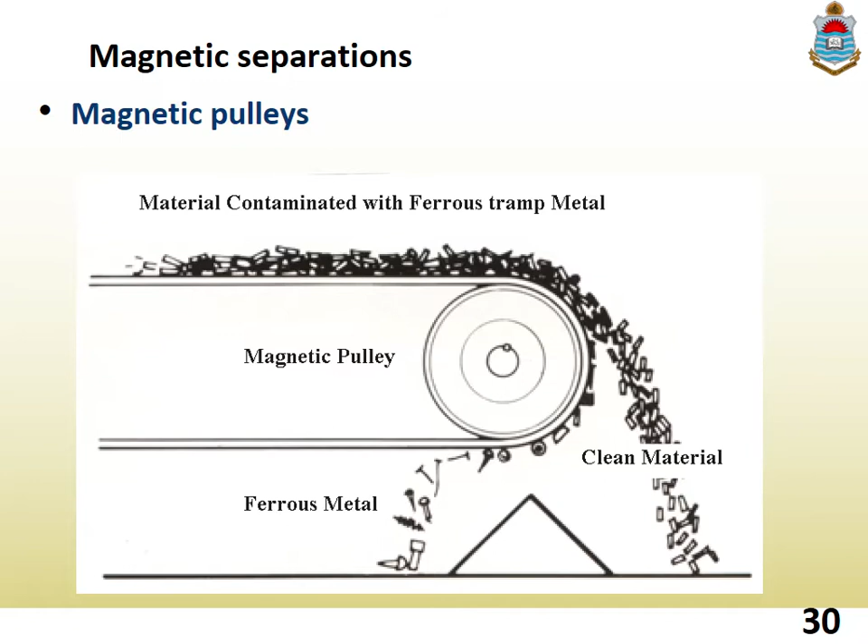pulleys, and one of them is shown here in the figure. In this configuration, the magnet is embedded in the head pulley of the conveyor. As the pulley spins, the magnetic force grabs the ferrous particles and carries them around and under the pulley, as it was shown in the figure previously, until the natural belt separation from the face of the pulley forces the particles to fall in the separate bin.

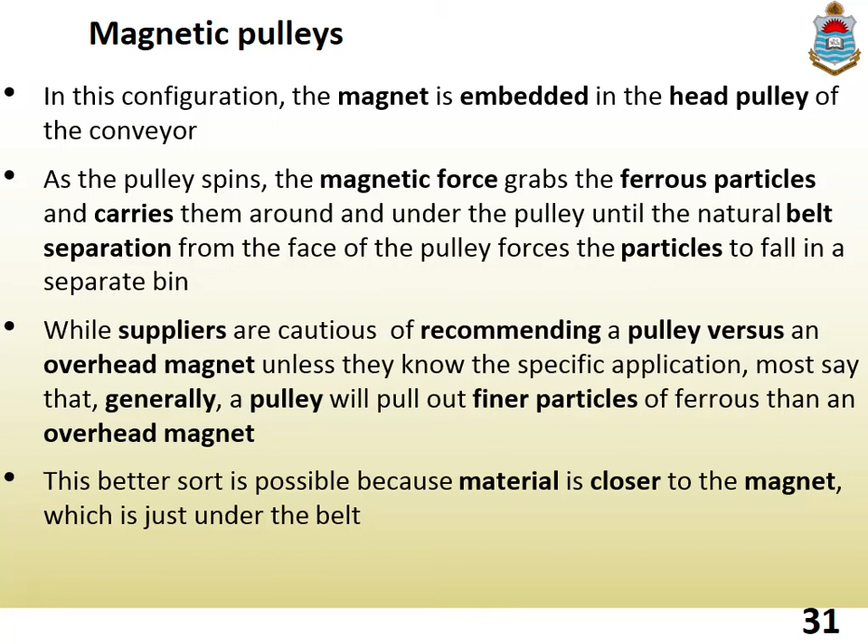While suppliers are cautious of recommending a pulley versus an overhead magnet unless they know the specifications, generally it is regarded that a pulley will pull out finer particles than the overhead magnet. Better sorting is possible because material is closer to the magnet in this case.

As far as the pulley is concerned, gravity is working in its favor as compared to the overhead magnets, where the magnets had to work against gravity because the overhead magnets had to pull the materials which are falling down. But in this case, the pulley is not exerting any extra force opposite to gravity.

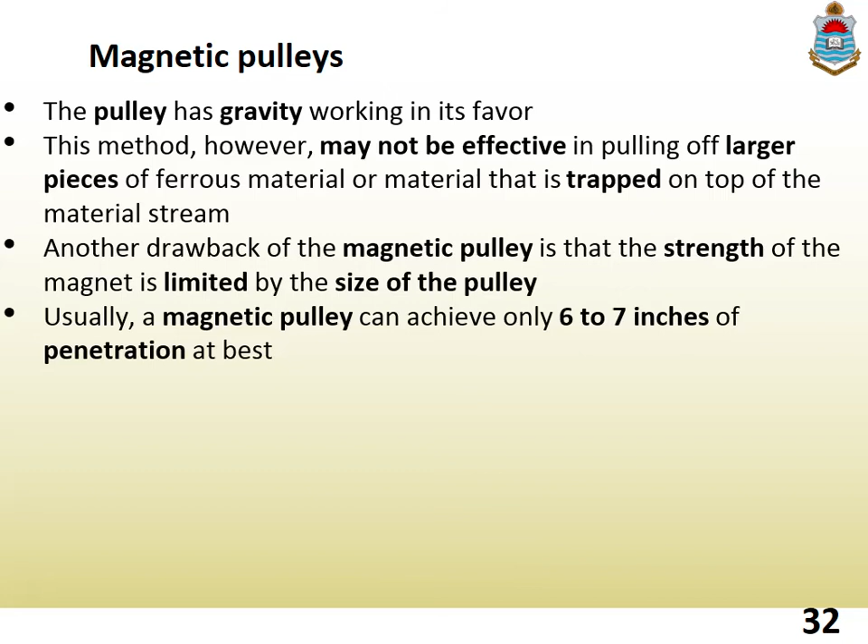However, this method may not be effective in pulling off larger pieces of material, or if some material is trapped on top of the material stream. Another drawback is the strength of the magnet is limited by the size of the pulley. Usually a magnetic pulley can achieve only 6 to 7 inches of penetration.

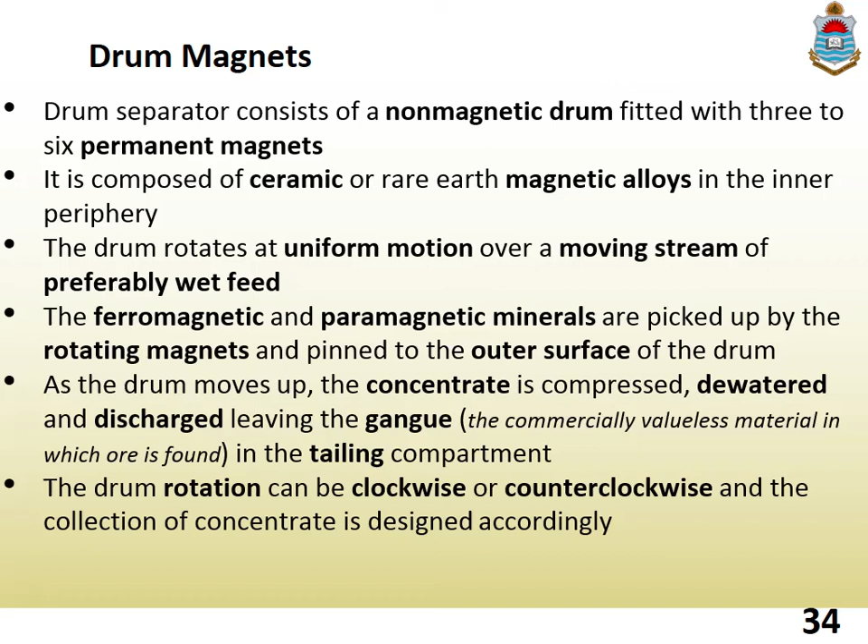The drum has a uniform motion over a moving stream, and mostly the feed is wet. Both ferromagnetic and paramagnetic materials can be picked up by the rotating drum. As the drum moves up, the concentrate is compressed, dewatered and discharged. The drum rotation can be clockwise or counterclockwise. And this type of separation produces extremely clean magnetic concentrate.

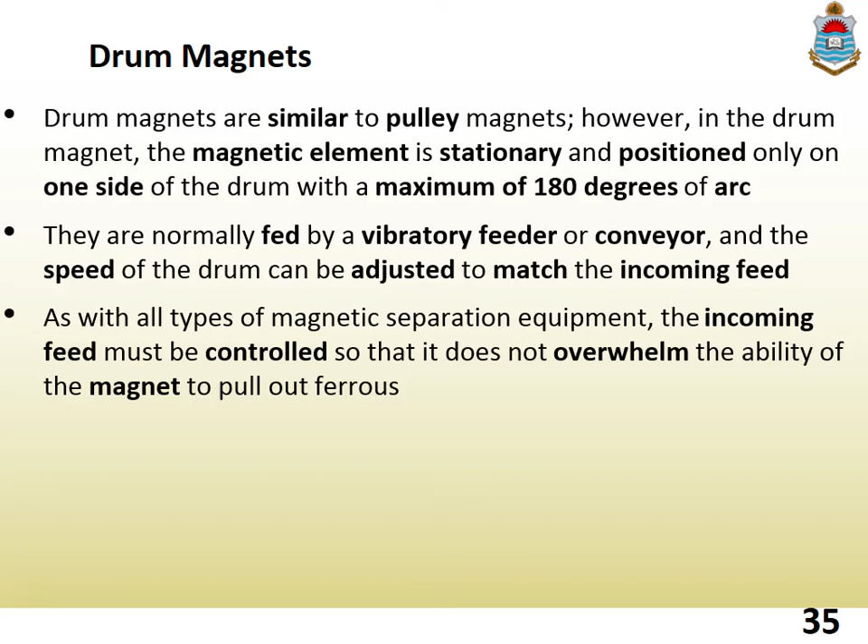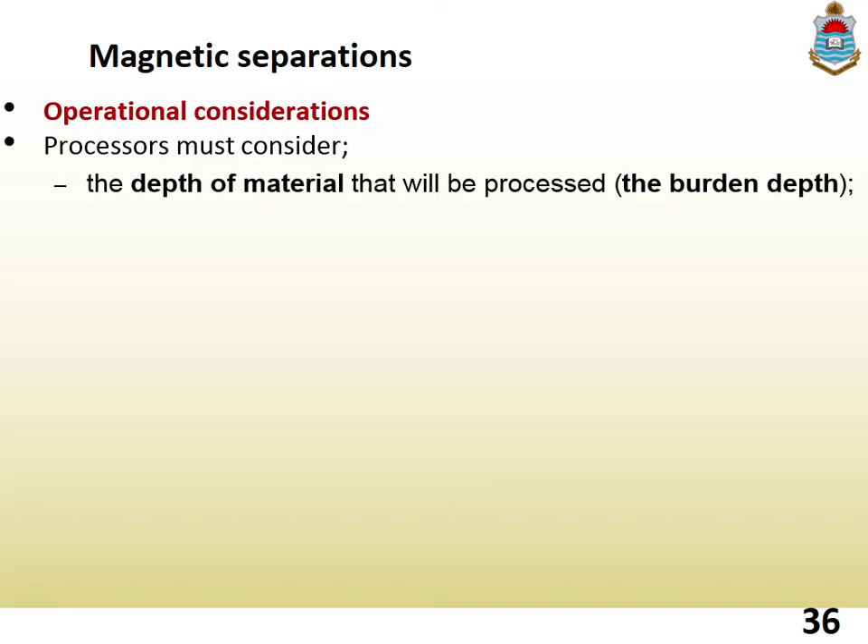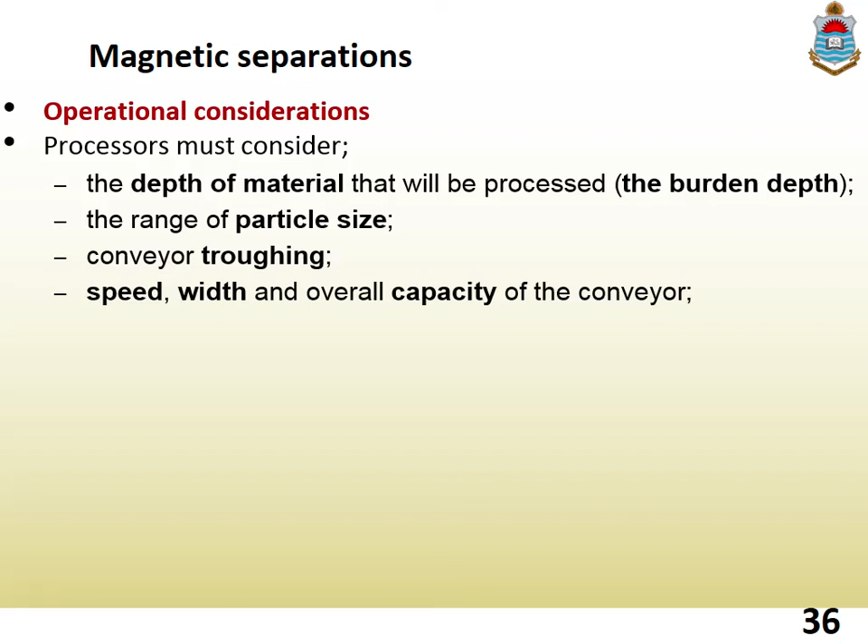So now we will discuss some operational considerations for magnetic separators. The processors must consider the depth of the material that will be processed, which is referred to as burden depth. We will see the definition in the next slide. The range of the particle size, conveyor troughing, speed, width and overall capacity of the conveyor, and also the density of the material stream.

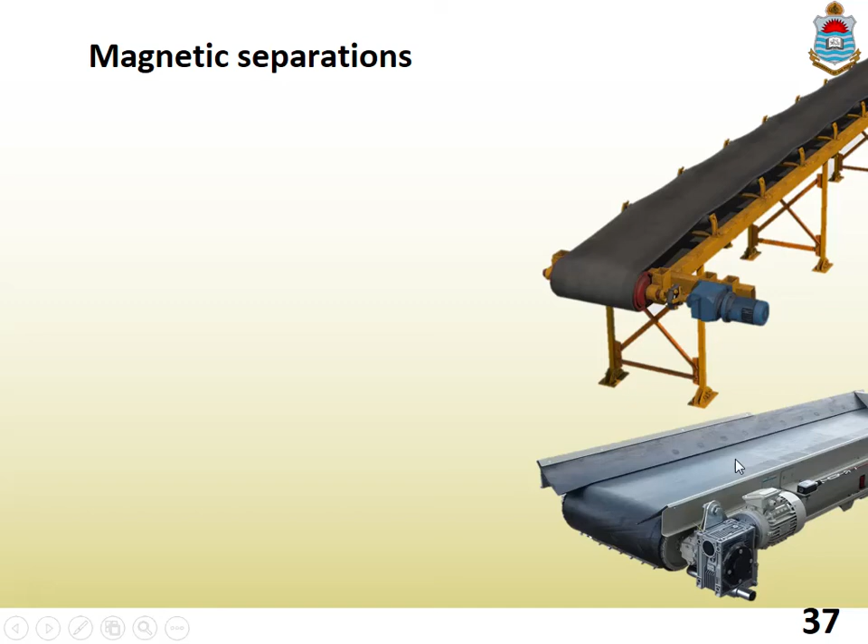So the bottom picture is showing the conveyor troughing. It has slightly higher ends so that the material does not fall off. Conveyor troughing applies only to the overhead magnets because conveyors normally run in a concave fashion. This is shown in the figure at the top, that there is a slight dip in this conveyor belt, and that is referred to here as the concave fashion, so the material does not fall off. But sometimes we can also apply this troughing so that the material does not fall off.

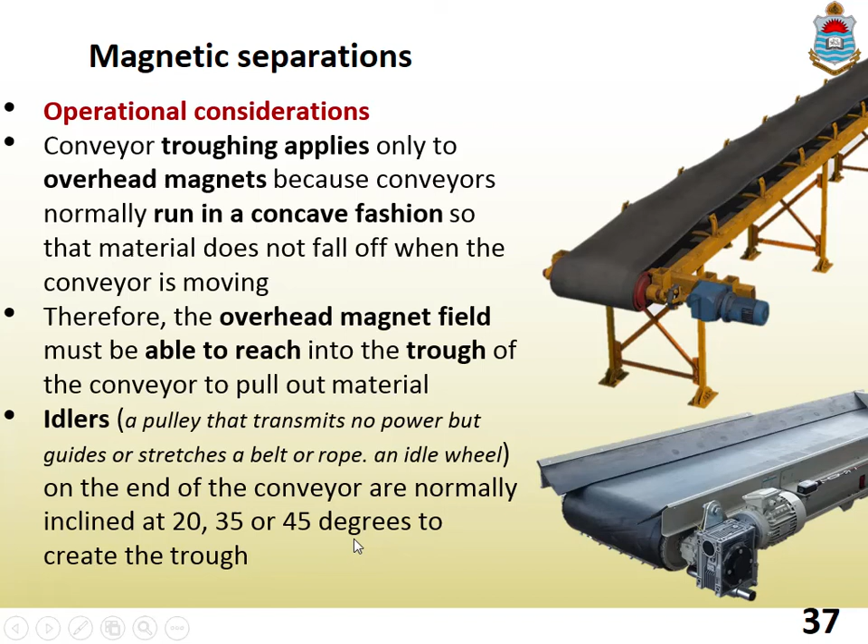Overhead magnets must be able to reach into the trough. So now there is a little dip also, so the magnetic field should penetrate more in the depth. Idlers on the end of the conveyors are normally inclined at certain angles to create the trough.

Now we will see the definition of burden depth. It is the average depth of the material on the conveyor belt, and it is useful to determine the maximum amount of material that the magnetic field must penetrate, so that no material is left without action by the magnetic field. The magnetic field must be able to penetrate throughout all the depth of the material it is processing.

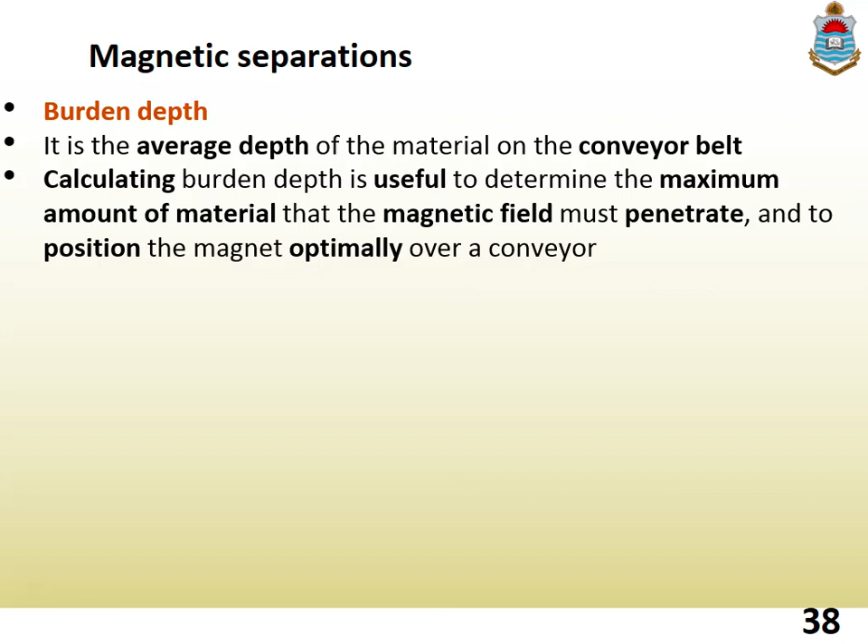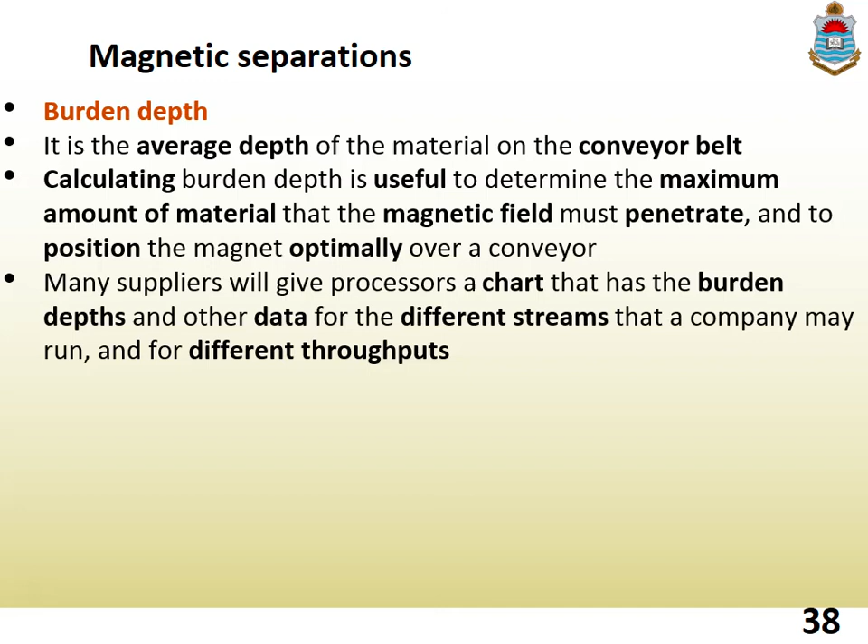Many suppliers provide charts and data about the burden depth and other related data for different throughputs, so that the processors, the companies which are utilizing these magnetic separators, can design their system accordingly. There are two types of magnetic separators: low intensity versus high intensity.

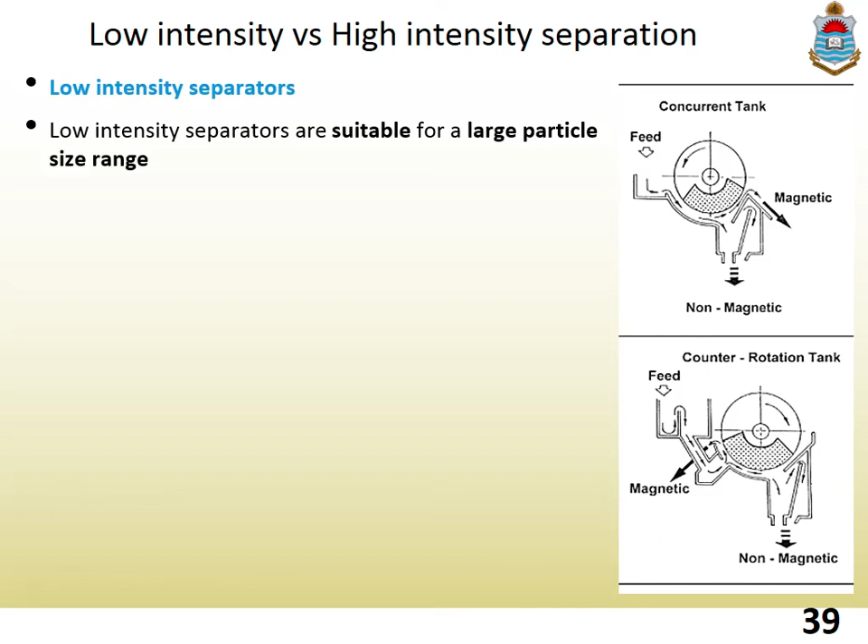Low intensity separators are suitable for a large particle size range. When the size range is huge, when there is a lot of difference between the smallest and the largest particle, and a wide size distribution exists, then the low intensity separators are suitable. Dry belt separators can separate large particles up to a few hundred millimeters. Wet separators are usually meant for fine ferromagnetic materials. These are all general rules.

They consist of a rotating drum with stationary permanent magnets. We just discussed this, the drum magnets. They can either have concurrent tanks or counter rotation tanks. These are shown in these two figures. In concurrent separators, the flow of slurry is concurrent with the separator. So we can see that the feed is going here, and the movement is in the same direction. It is moving counterclockwise, and the movement of the drum is the same as the movement of the feed.

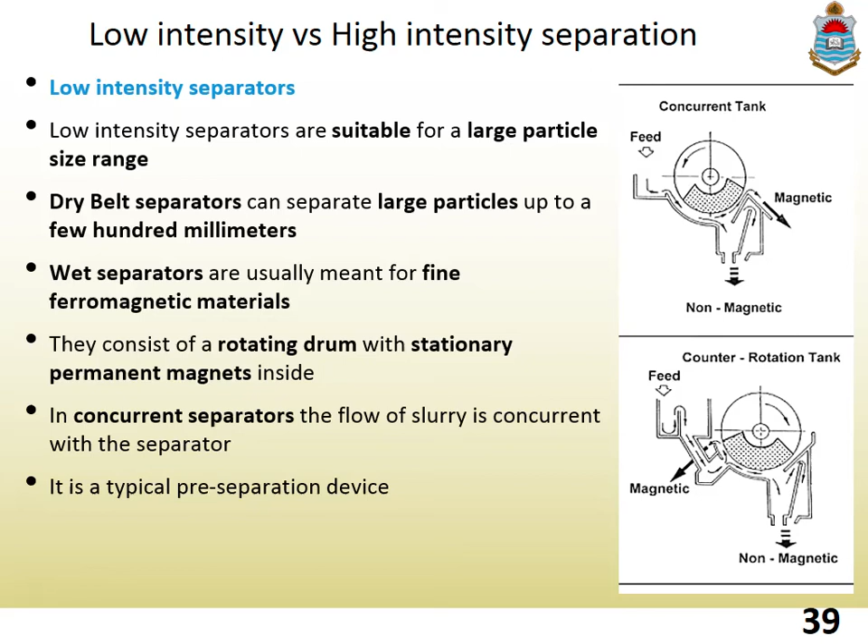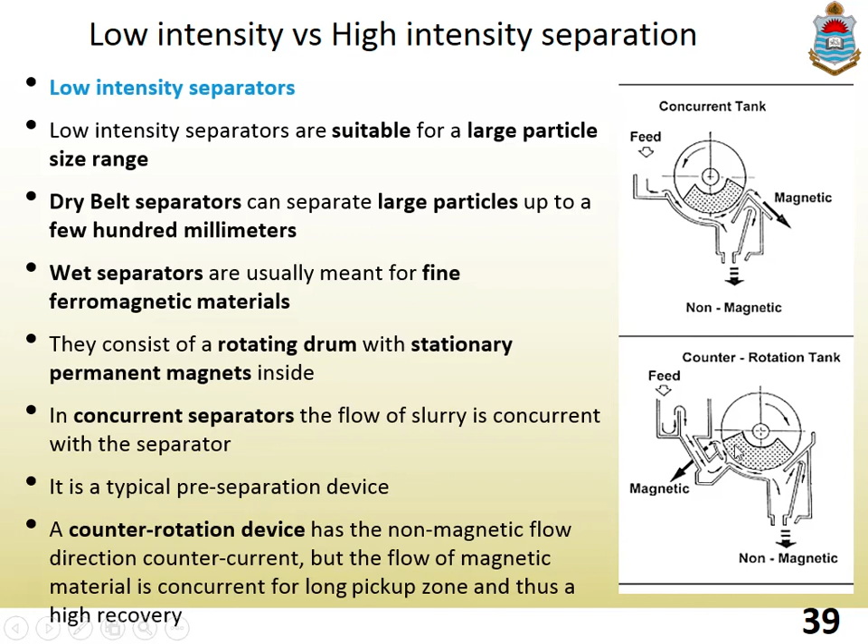A counter-rotation device has a non-magnetic flow direction counter current. So here we can see that the feed is going this way, and the drum is rotating clockwise. So the direction of feed and the direction of the tank are opposite to each other. So the difference is basically in the feed point. The concurrent devices can tolerate up to 8 mm of particle size. This is the diameter range.

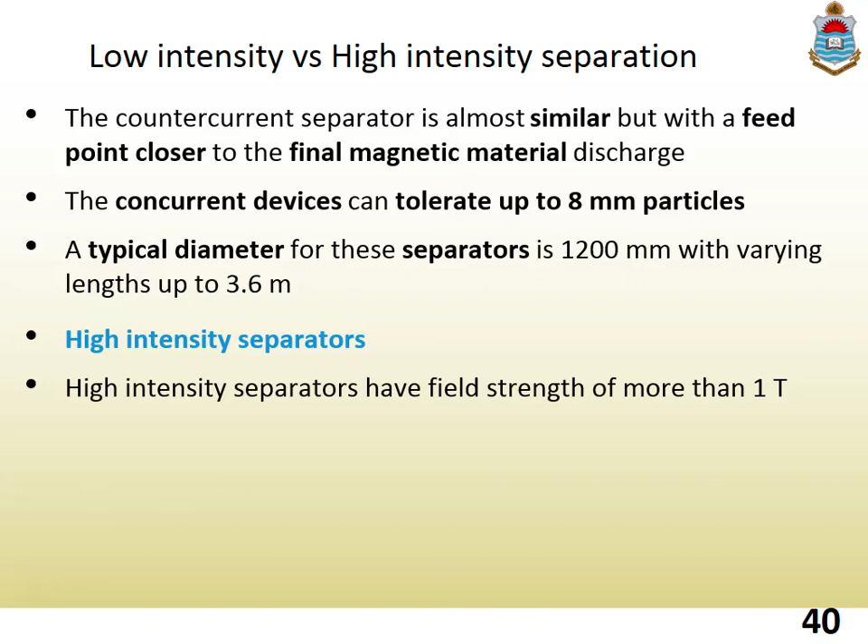As for the high intensity separators, the basic difference is in the strength of the magnetic field, and that can be more than 1 Tesla.

That is all, students, for the magnetic separators. In the next video we will discuss eddy current separation. Thank you.